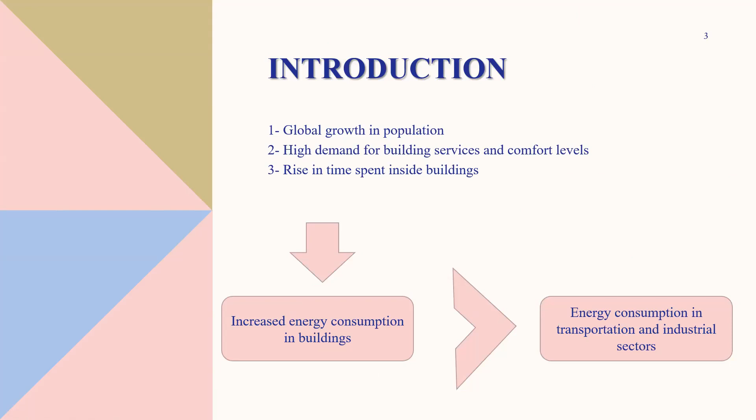So Lebanon is no different. It is experiencing increased energy consumption, especially in the residential sector, where residential consumption is estimated to range from 29 to 60% of the total electricity consumption in Lebanon. And if we look at the sources of electricity in Lebanon, there is the Électricité du Liban company, which generates electricity by utilizing fossil fuels in power plants.

However, some factors have led to electricity shortages in Lebanon. So people are making use of diesel generators in order to meet their energy demands, and of course, diesel generators have a lot of disadvantages. So the increased energy consumption, along with the great dependence on private diesel generators in Lebanon, is having a bad environmental impact, represented by the release of greenhouse gases, including CO2.

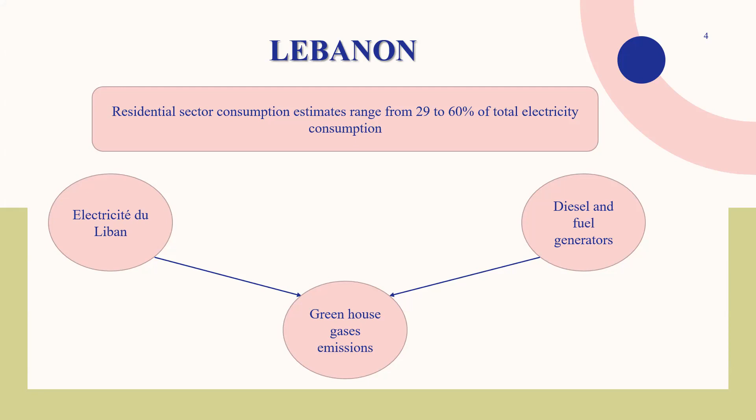So there is a big problem which needs to be solved, and a lot of efforts are being done. Ensuring a reliable energy supply while minimizing the environmental impacts is an essential step. And when we think of sustainable, sorry. Okay. Yes.

When we think of sustainable production of energy, we think of renewable energy, and it has different forms. We have solar energy, which is about converting sunlight into electricity. There's wind energy, which transforms the kinetic energy of the wind into electrical energy. We have geothermal energy, which generates electricity by harnessing the heat from within the ground. And we have hydropower, which transforms the kinetic energy of flowing water into electricity.

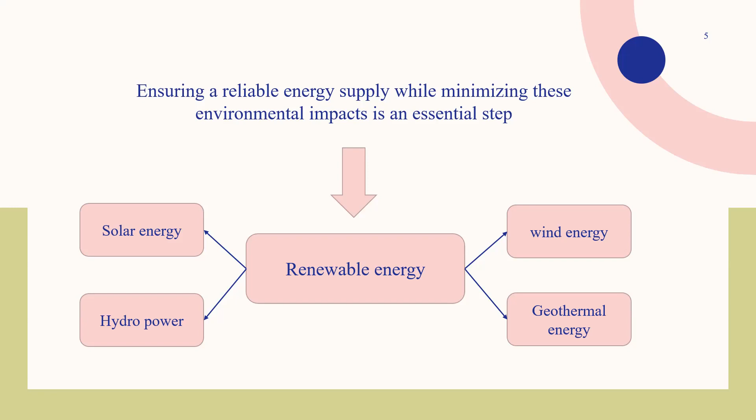So if we move into the context of Lebanon, we see that solar energy is one of the most attractive renewable energy sources, as Lebanon is characterized by its Mediterranean climate. It receives solar radiation over around 300 sunny days per year. So even in winter, we have solar radiation, and we can make use of it to generate electricity. Also, wind energy is favorable in Lebanon, as high speeds can be reached, up to 7 meters per second.

Okay, going now to the problem statement. After a quick introduction about renewable energy and the need for energy in Lebanon, especially in Akkar, we need to focus on the information that the wind speed of 7 meters per second is reached in Akkar. So our problem statement is about studying a small project. It's a house in Akkar, a real project taken from the market, from a company. It's a villa located in Akkar.

We will be studying 3 scenarios to implement a renewable energy solution to feed this house with electricity. The first choice is an on-grid solar system with a generator, just the solar panels with an on-grid inverter. The second is an off-grid standalone solar system without a generator, based on solar panels and lithium batteries.

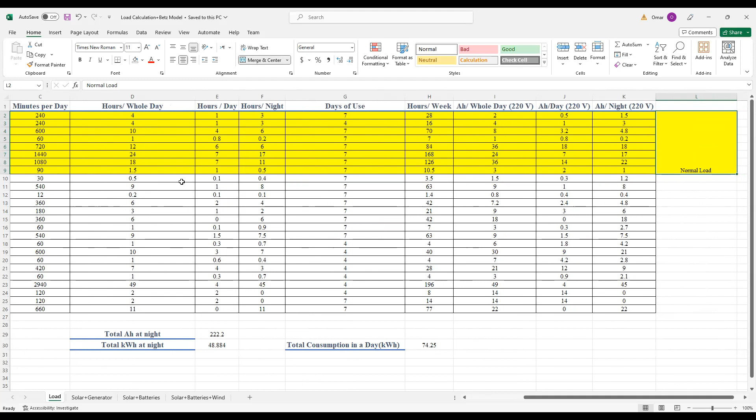Then we divided the time of use into day and night, and we also divided his load into normal load, the load that he usually uses, and something called additional load, which he doesn't use in the normal situation, but he said please design this project based on all the load. He wanted to cover everything, so that's what we did.

And here we can see that we divided the load into day load, to see how much the solar panels and the wind can provide us, and night load, in order to size the batteries or even rely on a generator in the case of the on-grid system. So I will get back now to the PowerPoint.

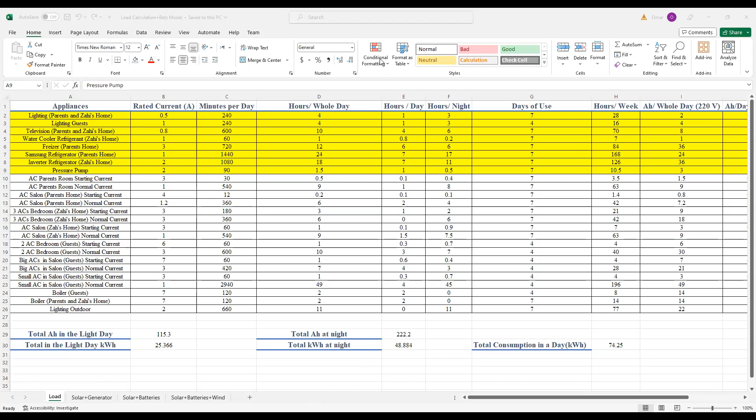Okay, so now after calculating the day load and then the total load, we went to the simulation tools. Actually, we did some Excel calculation, as I can share them again, just to validate our results through PVsyst, because we know that PVsyst is the smart simulation tool, and it's used a lot, especially in the Lebanese market. But most of the data on the PVsyst tool are from 1990, especially related to weather. So we need a factor of safety related to the numbers in this simulation tool. So we used a validation tool on Excel.

I will reshare it again. Okay. As we can see here, we calculated an estimated number of the panels using the rule of thumb, and the numbers were very close, with a percentage of error around 2.5%. And all other simulations related to wind were calculated based on the Betz model, which is the best model to estimate the wind energy, and it was also calculated on Excel. So everything is shared in the report, and the Excel sheets were shared with the professor also.

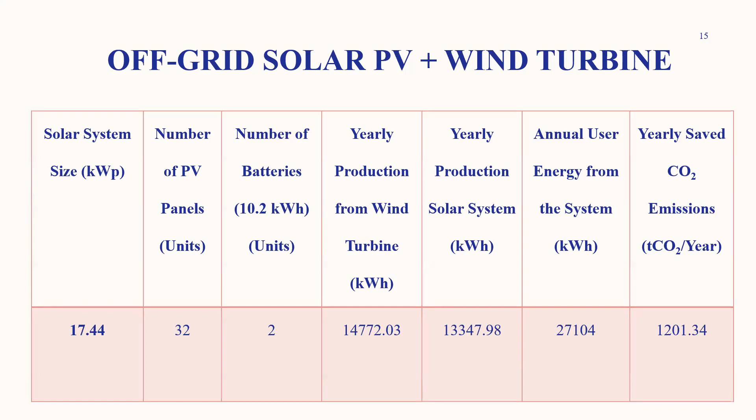Okay, moving now to the financial results. Actually, we shared the technical results, and it's important to share that by using the wind turbines, we can reduce the number of panels to 32 from 40, and also the number of batteries in the off-grid system. As we can see here, we used around 4 batteries, lithium batteries, 10.2 kilowatt hour, and when combining with wind turbines, we reduce this number, and we know that the most expensive part of any off-grid system is the battery. So this affected also the financial results.

Actually, here we can see that we did a financial study from different parameters, and it's important to share that those parameters, all of them, were calculated through PVsyst. And we didn't calculate it manually, actually, because it's easier to take them from PVsyst, and it will be more accurate. Also, we can see that the estimated lifetime for panels is 24 and 25 years, and the lithium battery is 10 years.

Concerning the wind turbine, there are studies that estimate the lifetime for 30 and 40 years, but because it's not a very big wind turbine, the number of guaranteed years are around 25. And for the capital cost, for sure, this cost is also calculated through PVsyst, and I will share now the calculation. It seems that the most expensive system is the combination of wind and off-grid.

And for other parameters concerning the IRR, the ROI, the net present value, and the payback period, they are all shared in this slide. And it's important to take those results into consideration and combine them with the technical results to form this matrix of decision. And here we can see that first I will share part of, like a sample from the PVsyst simulation.

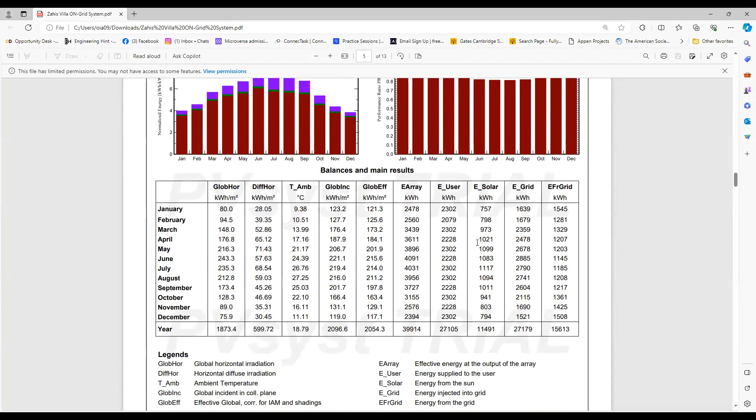Yes, actually, here all annual production and values and the tables are got from here, and this represents the diagram of losses. We can see here numbers concerning the financial. That's the single line diagram, and concerning all cost here related to equipment, we took them actually from a company. Official quotation from a company related to those prices.

For sure, they differ. For example, the price of PV panels 1 month ago, before the VAT exemption thing, was around 180 and 150. Now it's around 120. Those prices change, and that's everything related to the calculation of the financial parameters, the electricity, the ROI, the IRR, and this represents the net cash flow.

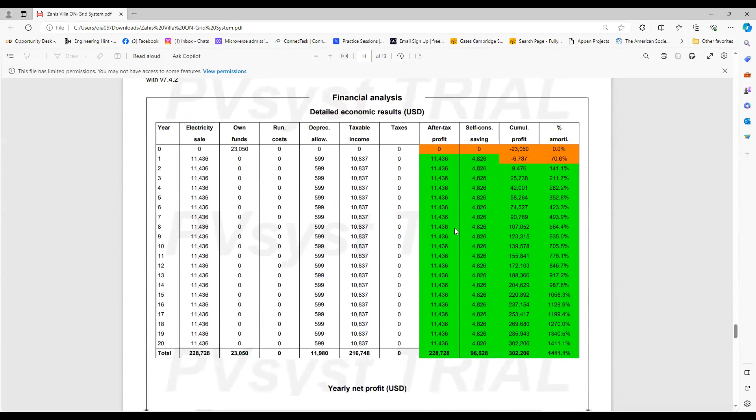And there is an important factor here that you can ask now, what about the wind payback period and the things related to the financial results of the combined system with wind? Okay, we calculated the wind model alone in an Excel sheet and then combined it with PVsyst. How can we calculate the values? Actually, there is a tool inside PVsyst to add an external source, because there is shortage sometimes inside PVsyst. We can't compensate the load and the demand. So we can add an external source.

Usually it's a generator, but in our case, we added the wind turbines. There is no wind turbine inside PVsyst, but we entered data related to wind turbines. For example, the lifetime, the production per year, and some characteristics in order to calculate the financial data related to the wind turbines. Because for sure, we can't take just PV data related to solar and say that they are for both. And moving now to the matrix of decision.

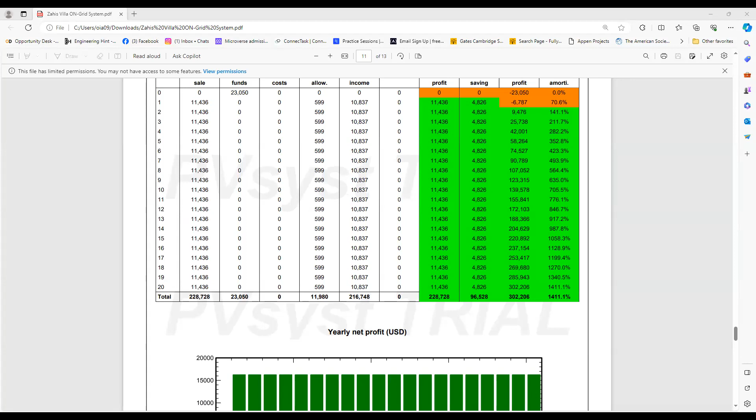Okay, you can see the PowerPoint right now? Yes, you can see it. Yes, we can see it.

Okay, actually, the matrix of decision is not based on the usual market, because we did an exercise. We asked the client on the most important factor, and he said something very important. He said that he has something related to cancer in the genes of his family. So the most important factor in his situation is the CO2 emissions. It's actually the first time we see such a project, but for sure we can't weight things depending on literature while the client sees other approaches. So we give the highest weight to the CO2 emissions in our case.

Secondly, he's interested in the cost, the annual production, the lifetime, the maintenance and the noise. For sure, we didn't ask him the questions directly. We explained the things, and we said what's the most important. It depends. We shared everything in the report, and some interpolation was used to calculate.

Guys, please mute your microphones, please. Guys, mute your microphones, please.

Okay, we used interpolation to calculate values between 0 and 1. We gave 1 for the best performance and 0 for the worst one, and an interpolation was done. We could assume 0.5 for the medium approach, but we calculated the grade using the interpolation in order to see if it's more on the bad side or the best side.

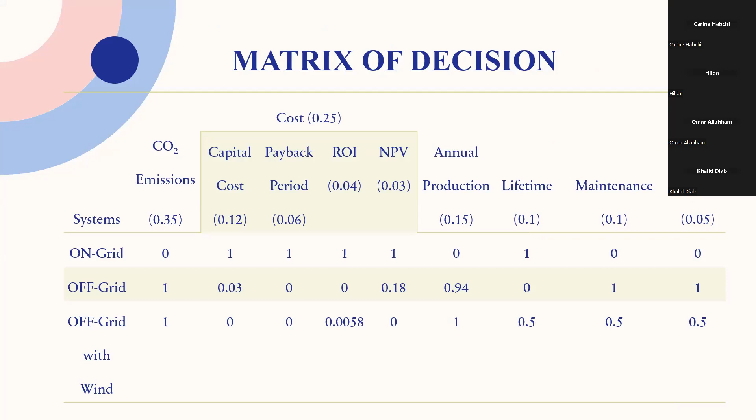Okay, before ending, it's important to mention that we still consider the off-grid system with wind an option, because as we can see in the decision matrix, for lifetime, maintenance, and noise, the medium performance was taken as 0.5 because they are qualitative factors and not related to quantity. So in some situations, we can change this weight. For example, it could be 0.7, and this will increase the grade of the off-grid with wind. So we can still consider the off-grid and the off-grid with wind, and ask the client about the best choice for him at the end.

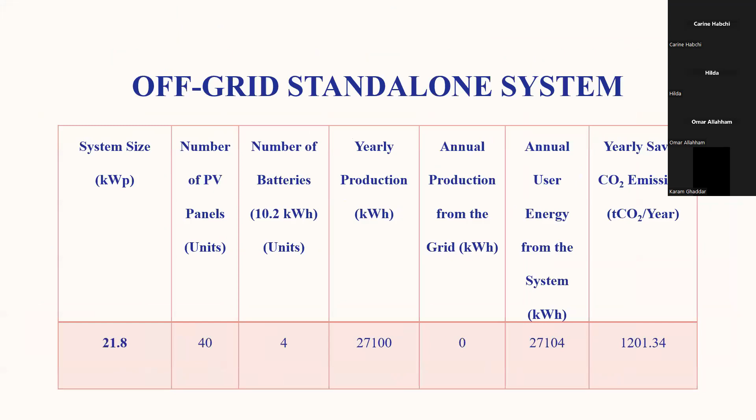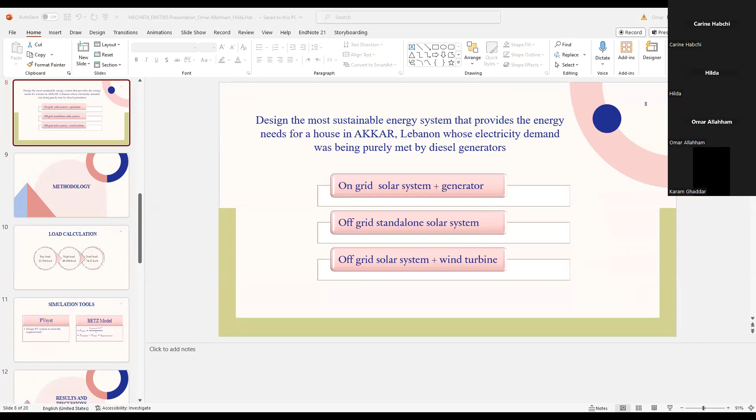But for the systems, can you now describe a little bit the 3 systems you use? Do you have pictures showing the system implemented? The main components of your systems. Okay. Actually, they are shared in the PVsyst, because we selected those parameters. Where is the financial? Okay, I will share something from here. They are all in the PVsyst simulation.

Okay, we have the PV modules. We selected the Jinko 545 watt peak, and we have the support. So for example, here, do you have other options? Why did you select this item? Why did I select this Jinko? First, because it's the best. LONGi and Jinko are both the best brands for solar panels and the most efficient ones.

And there is some limitation in the PVsyst trial or student version in general. They don't include the newest brands. So we used the best one related to efficiency as we know in the market. And concerning the inverter, for the on-grid, I selected the Sun 2000 from Huawei. It's the most common inverter used for on-grid systems. And for the off-grid system, we selected... Hilda, can you continue, please?

Yes, so we selected those that are mostly used in the market and that are included in PVsyst. And we've also done the optimization of the tilt angle. It is also included in the report. So to optimize the performance of the system to generate the highest electricity possible during the time of implementation.

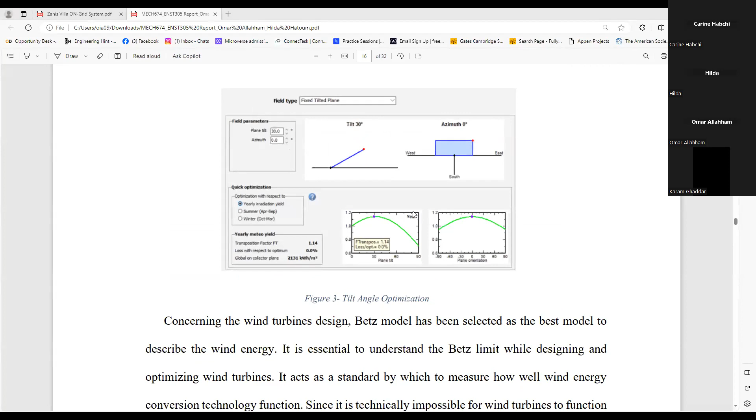Okay, you can see now, Hilda, the picture. Could you please make it bigger? Okay, now. Yes, so this tilt angle that is chosen corresponds to the optimum loss, which is 0%. We usually have the tilt angle equal to the latitude. It is agreed in literature to be equal to the latitude of the location, but we changed it in our case to have zero loss.

And it's also important to mention that it's mentioned in the literature by Sassine et al. that the lowest losses in irradiation will be when taking the plane tilt at 30 degrees. It's mentioned also in the report. Both are presented in the literature, but we chose this because it showed us the lowest loss from irradiation on a yearly basis.

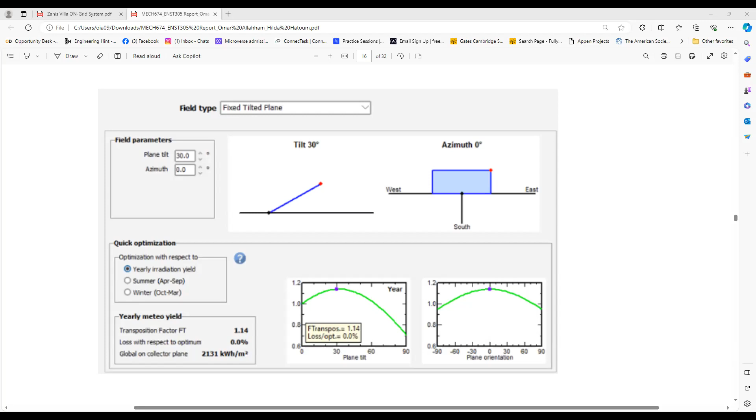Okay. Concerning the wind energy implementation, can you give more details about the formula you used? You used the maximum possible wind power considering the Betz limit, or what factors did you consider? Yes, for sure. I will share the Excel related to the Betz model here. Just a moment. So as we mentioned earlier, we did some validation on our PV system. Hilda, can you comment, please?

Yes, sure. So regarding the Betz model calculation, we calculated the output which could be gotten from the wind. Since this is an ideal output, we took into consideration the efficiency of the generator inside the wind turbine. Omar, you can go to the presentation. We multiplied the power output with the efficiency of the generator to get a reasonable amount of wind energy. Betz model, yes, here. We calculated the P ideal from wind. The P ideal is the ideal one, but then we took into consideration the efficiency of the generator. Okay.

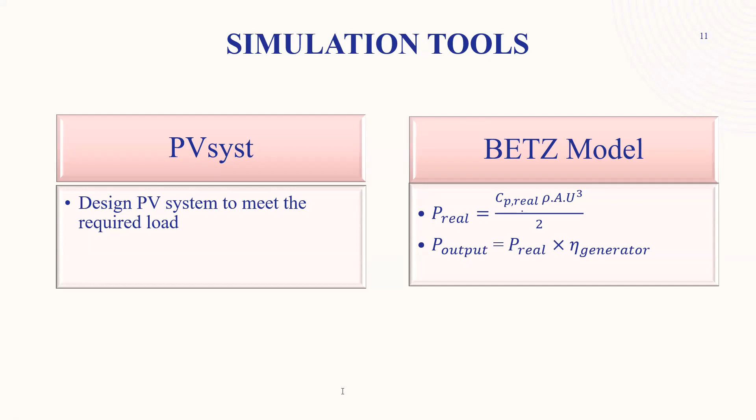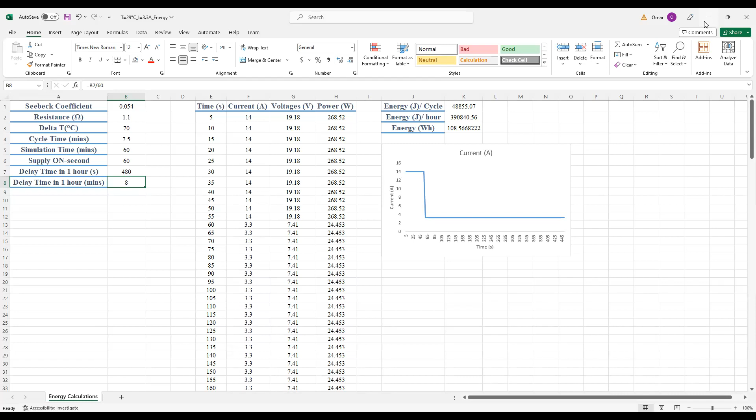And concerning the implementation with PVsyst, can you talk more about the integration of your model in PVsyst? Yes. So regarding the PVsyst integration of wind, after calculating the energy that could be gotten from the wind during the day by taking 8 hours, and during the night by taking 16 hours, we did the load demand minus the wind power, and then we input it into PVsyst on an hourly basis. So PVsyst took care of the load which has to be provided by the PV panels, and the rest was done with the help of the Betz model.

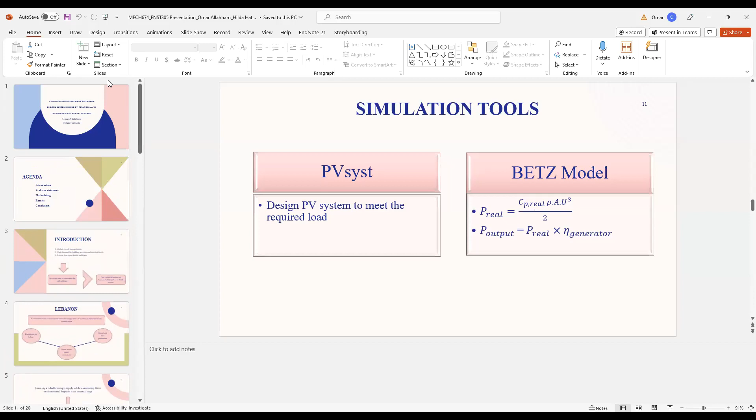Okay, great, thank you. Dear students, do you have any questions for Omar and Hilda? Okay, so from this project, we can see the different steps of the design process, and we build the decision matrix to come up with a final decision. Now, concerning the decision matrix, I will do an example today as a revision for the exam. Omar and Hilda used percentages by asking the client, and this is what we usually do.

But whenever we consider a project on the macro scale, we don't only ask one person; we ask several persons that are affected by the project, and then we can come up with some statistics in order to put weights. For this exam, we don't have to know how to put weights, because we'll learn this later. But for your projects, you can implement the decision matrix by calculating the score as we did. And now we'll do an example on this together in the revision session.